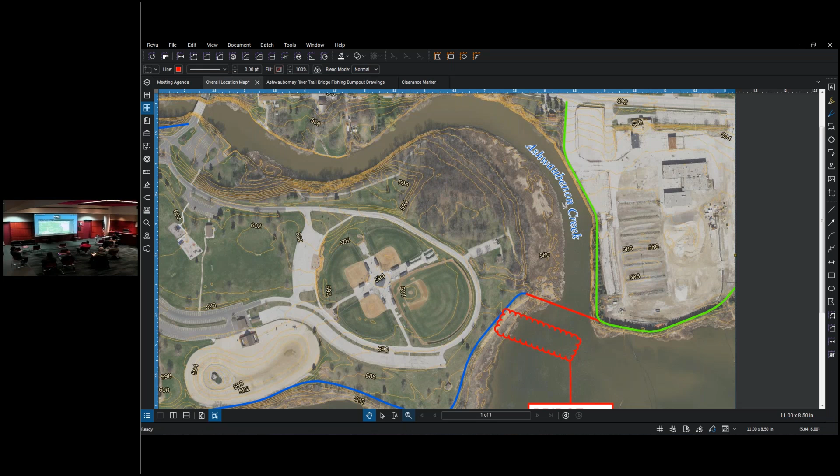All right, so let's start with some context. The agenda, hopefully you all have a copy of, you can follow along, but this is how I'm going to follow. We'll talk about those items. Let's start with some context of where we are, which you probably all know, but it helps everybody understand what's around it, where it is exactly, those features. So needless to say, the bridge is on Ashwaubenon Creek, adjacent to Ashwaubomay Park here, and Alden Station here.

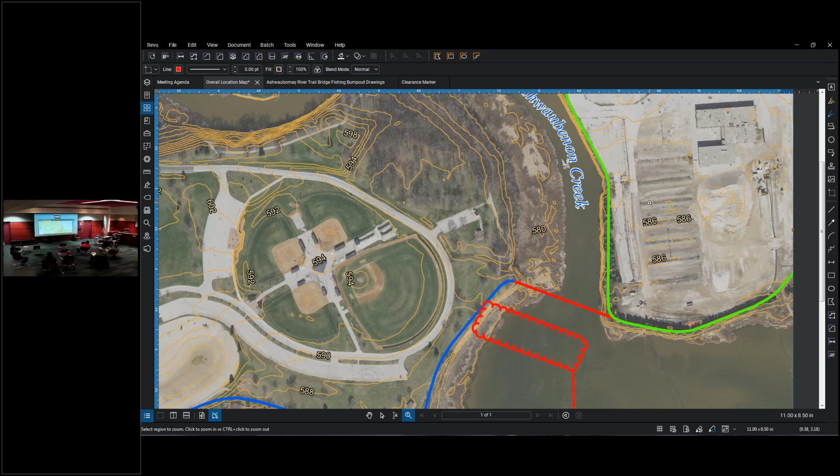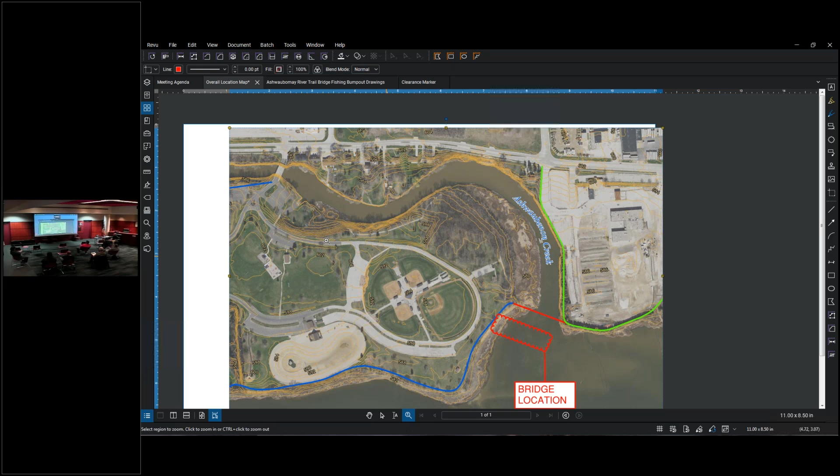What you're seeing, and my bubble moved around a little bit, is as I zoom out, Broadway to the west, here's the entry drive that goes into the park and the bridge. You can see the creek snaking around before it discharges into the Fox River, and the interior of Ashwaubomay Park. What we want to show you here is just the context of where the bridge is, and my bubble moved a little bit, so bear with me.

This is basically the trail. That's a future trail that was studied a little bit. This is also a planned future extension of the trail. And really the bridge, apologize for my bubble moving because this aerial background is a big image and takes a second, but the bridge is basically right here where this red line is.

So it's really right at the mouth of Ashwaubenon Creek, landing on the park side to the south, and then at this little point here, which is at the corner of the Alden Station development, to the north of Ashwaubenon Creek. So contextually, the creek, the little landing, boat landing and parking, the driveway, and as I mentioned, Broadway up on top of the screen, the west side of the site.

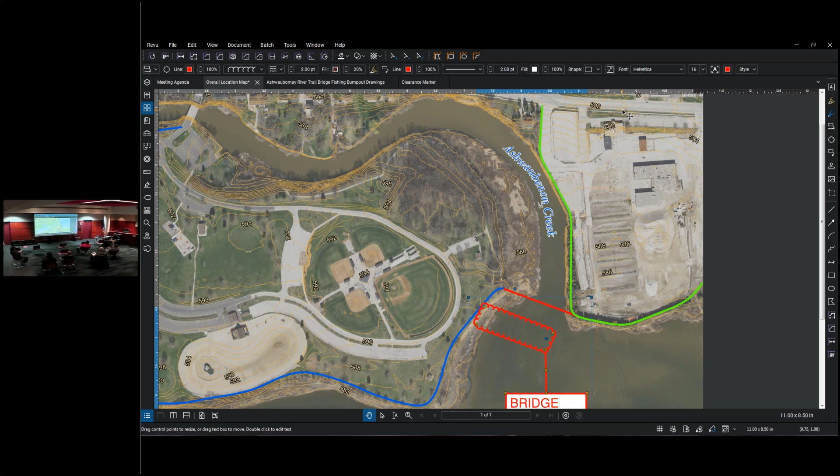So that's context. Let's get into a little more detail on the actual bridge itself, where it stands today. These are development drawings, and basically what this is showing is effectively the alignment in a little more detail than what that last colored chart showed.

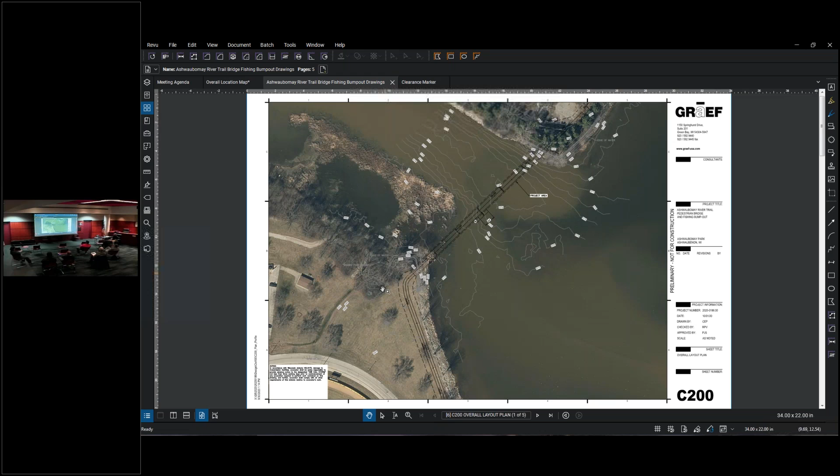Survey has been done, so you're seeing contoured survey lines within Ashwaubenon Creek bottom, the bottom of the creek, as well as some survey along the banks. The trail we've set in alignment, and then we're showing the bridge crossing here.

I'm going to zoom in just a little bit. As it generates, I'm going to pause a second so it can be seen on your end.

As I zoom in here, there's some things we're working out with the design, verifying pier spacings, the column supports basically of the bridge, how long those spans are, where the fishing bump out is going to be, looking at slopes and profiles still, but that's in process.

You can see the alignment of the bridge that comes across here. It's the straight section after the curve on the park side, and then you can see the landing up by Alden Station on the north side. So the bridge basically extends from this location here, just on the bank, to the bank on the opposite side.

As soon as we get on the bank, there will be abutments, and what you're seeing intermittently, there's 1, 2, 3, 4, 5 of them, and those are pier supports, bridge piers that are going to be supported with piling, and then a concrete pier cap. On top of that will be girders, and you'll see imagery of that as we get through this presentation.

From a contextual standpoint within the site, the fishing bump out is currently in the middle, but that's one of the things we're still vetting, where do we put that. The spans right now, there's 1, 2, 3, 4, 5, 6 spans along the whole bridge, roughly about 65 feet apiece. You'll see that on the next sheet as I get into more detail.

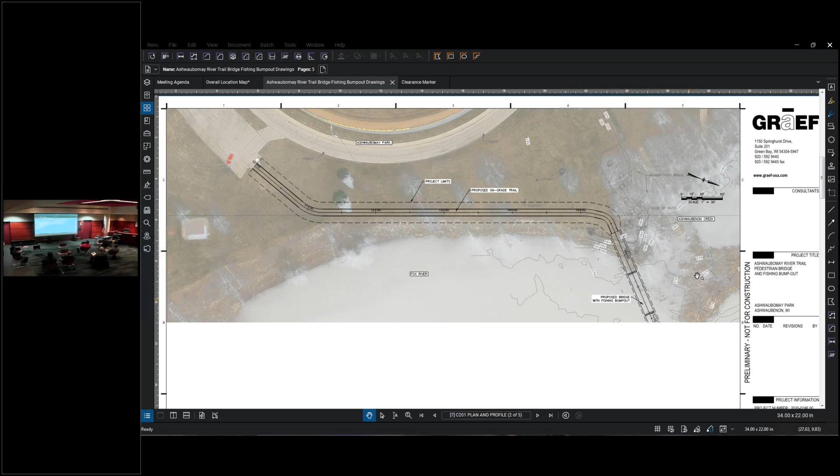Thank you. So the trail coming through here, again, a 12-foot wide trail coming all the way up to the bridge abutment, and then the bridge is slightly wider at 14 feet. You can see the contouring again around the bridge. I'm going to go to the next sheet, which is really the bridge sheet.

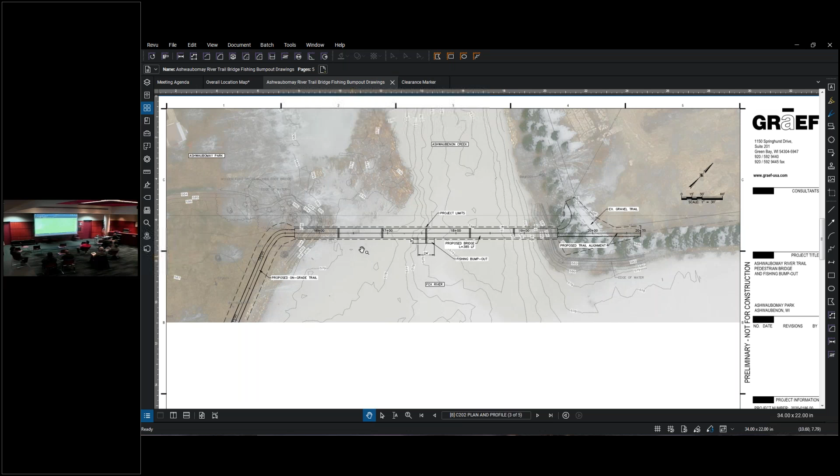Again, there will be a profile view on the bottom that shows the slopes of the center of the trail and the bridge itself. As I zoom in here a little bit, you can see better the building or the bridge outline, and you can still see the contours.

You can see the deep part of the channel at 573. You can see the bank at about 580, but there's pretty shallow areas as you get to the southerly half of the bridge, a couple 2 to 3 feet deep generally, and then a little bit of a steeper drop off on this side.

Basically, we're showing a fishing bump out in the middle, which we're trying to vet exactly where we put that. And then, as I indicated, piers at these locations currently have about 65 feet spacing between them, so that's a 65-foot clear span in each of these locations.

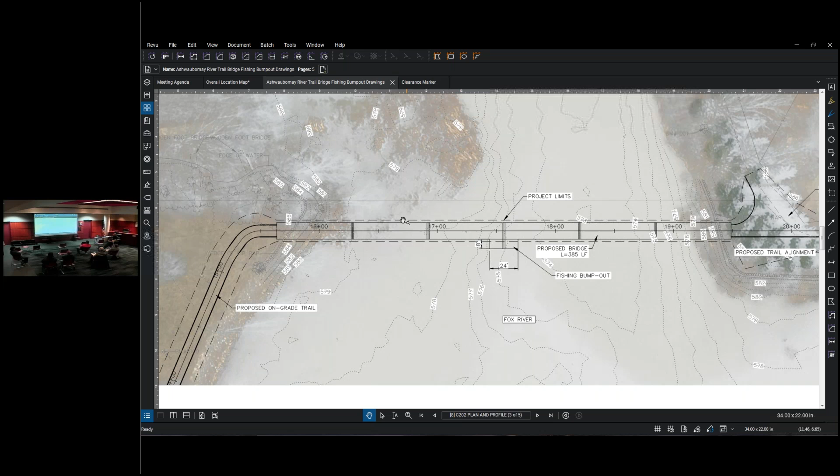And then the landing on the north end near Alden Station - this is being looked at a little differently because of the sloping we need to do to get down and connect that trail going by, but this is obviously still in development.

So that's kind of the civil drawings, if you will, which show layout, alignment, slopes, dimensions, location - those kind of things. The next things I'm going to show are the structural drawings, and this will give you a better picture of what it's going to look like.

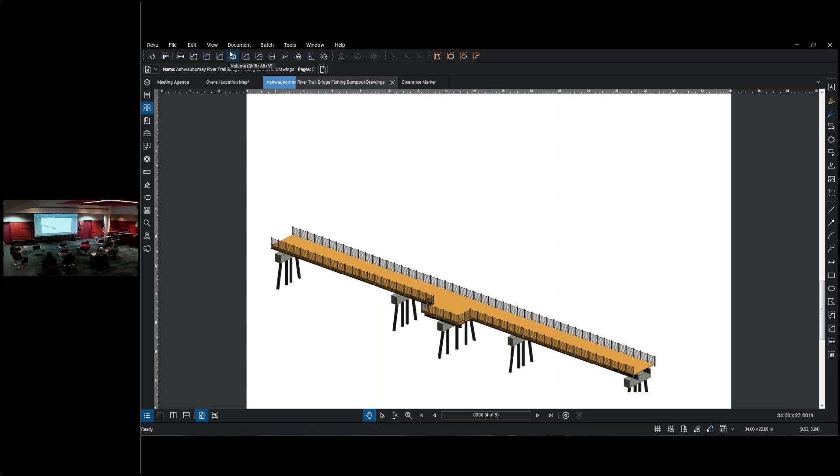This is a rendered 3D Revit snapshot - we build these things in a model, and this is a snapshot out of that model. As I had indicated before, we're going to have piling supporting the piers, which the girders will sit on, spanning through 5 different piers, plus the abutments at the end - so 1, 2, 3, 4, 5, 6 spans.

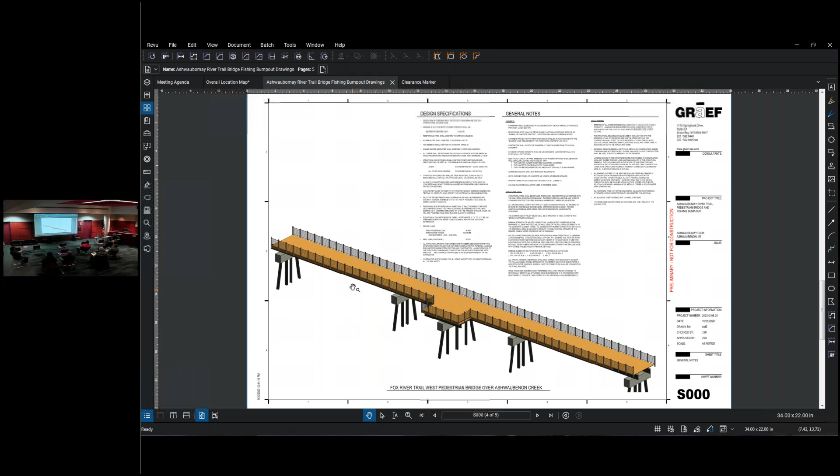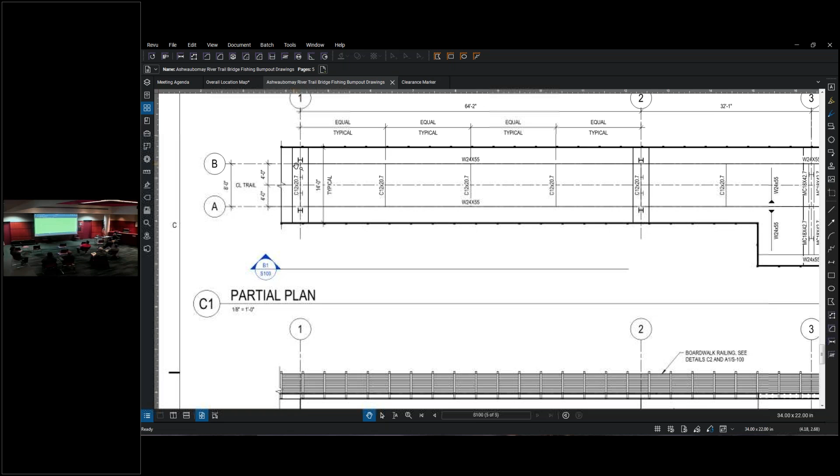That's just a snapshot, structurally pretty technical. The next sheet I want to show is again a structural drawing, showing an example of the bridge deck with the fishing bump out. As I noted before, it's 14 feet wide. This is the spacing between the girders that you're seeing here, along with some other structural information.

More importantly, just to give you an image - I'll show you some photos of a bridge. In the last 6 or 7 years we've probably done half a dozen bridges similar in this design, meaning they have the piling, round pipe piling with a concrete pier cap, a steel girder beam, and then decking - timber with a composite surface.

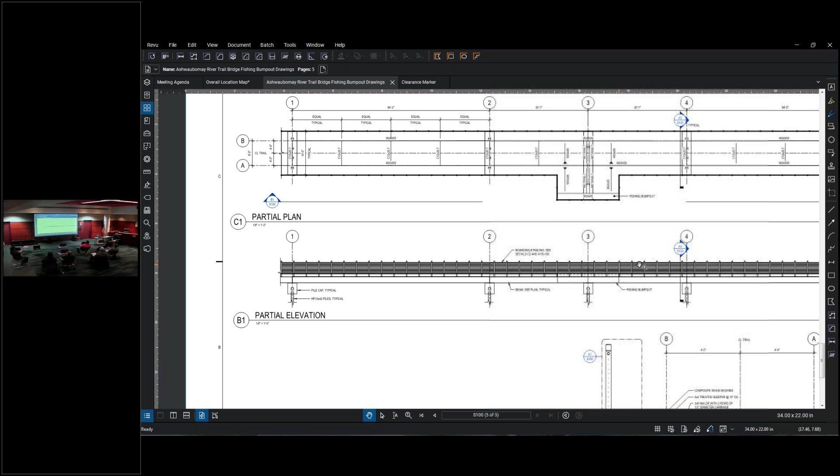And then the railing is a combination of a cable railing with a top and bottom aluminum rail and wood posts. That's what you're seeing here - the piling, the pier caps, the girder, and then the decking and railing that will be up on the bridge deck, protecting people from falling into the water.

Here's a little structural view - if I cut a slice through it, if you're standing on the deck, this is kind of what you're looking at: the deck here, the railings on the side, the girders, the diaphragm which connects the girders, and then the concrete pier cap with the piling that would be driven into the riverbed to support the structure.

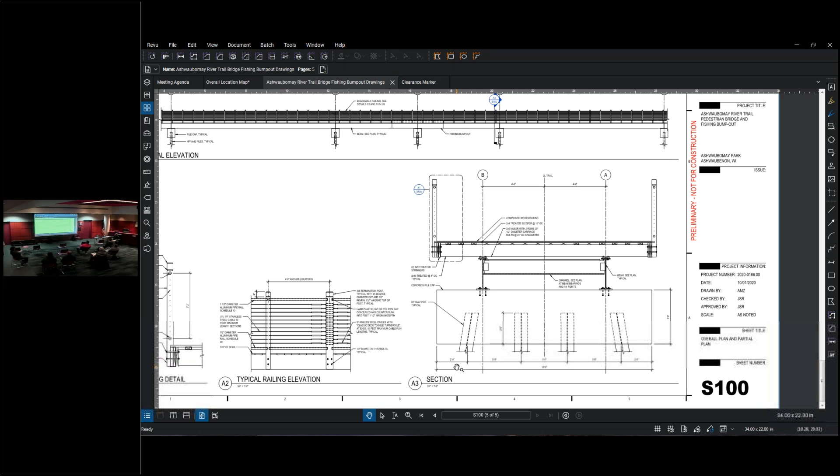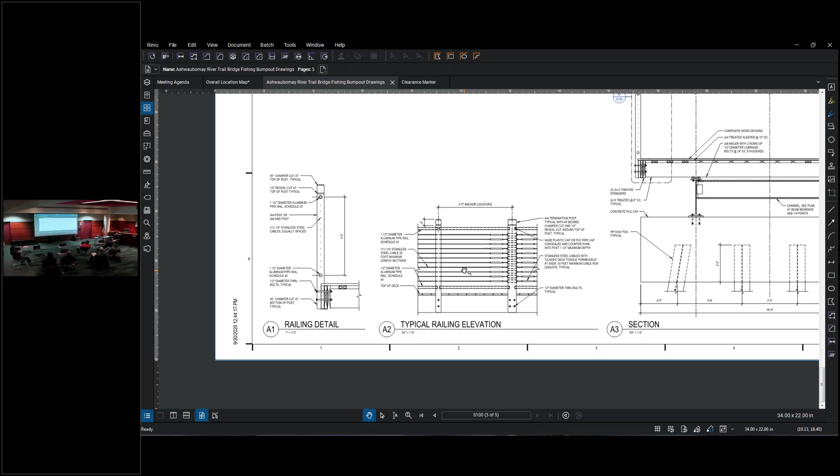And then just a little snapshot here of the railing detail itself. I'll have some pictures so you can really see a 3D or colored version of this, which will give you a lot more clarity, but basically it's top and bottom rail, the decking being here, wood posts, and then stainless steel cable railing in between to provide the OSHA required safety separation gap that we need to meet.

So that's our structural drawings - again, pretty technical, but it gives you a little picture of it. I think more importantly will be the next images I'm going to show.

First off, I'm going to show you an image of the fishing bump out, which is that center feature off of the main deck - the 14-foot wide deck, typically it's 12, so we're actually looking at a 2-foot wider deck to allow, if people are fishing along the railing, that there's still room for 2-way traffic to pass, bike and pedestrian traffic.

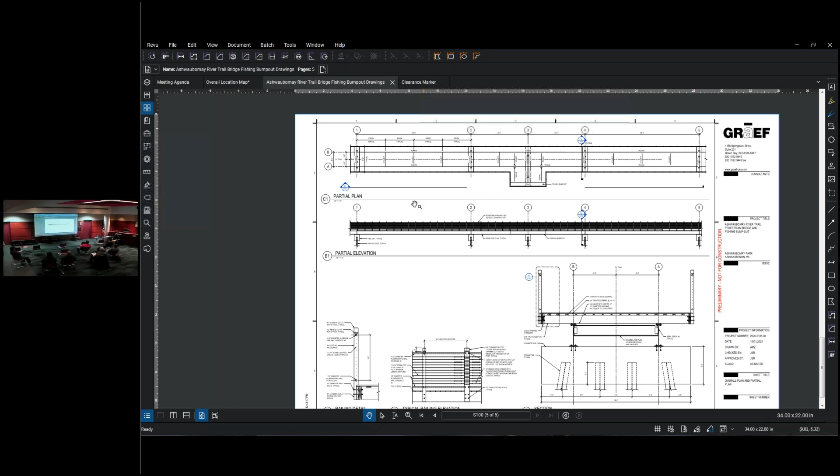But this gives us a little bit extra width for railbirds, as we call them, and also a fishing bump out, or observation area, that people can really get off that traveled way.

So let me get to that imagery. There we go. Okay, so this is a rendering that we've done for a previous project, to be truthful, but it is the same design and it's the same size. Roughly speaking, this is an 8-foot by 24-foot platform that extends off of the main girder.

You can see we have steel girder framing around the base of it to support that, but otherwise it's the same design. It's going to have a timber substructure with composite decking, wood posts with top and bottom aluminum rail, and you can kind of see the cable railing in between.

Lighting, for this client, that's what they wanted the lighting to look like, but we're working that out with Rex and his staff yet on what that's going to look like.

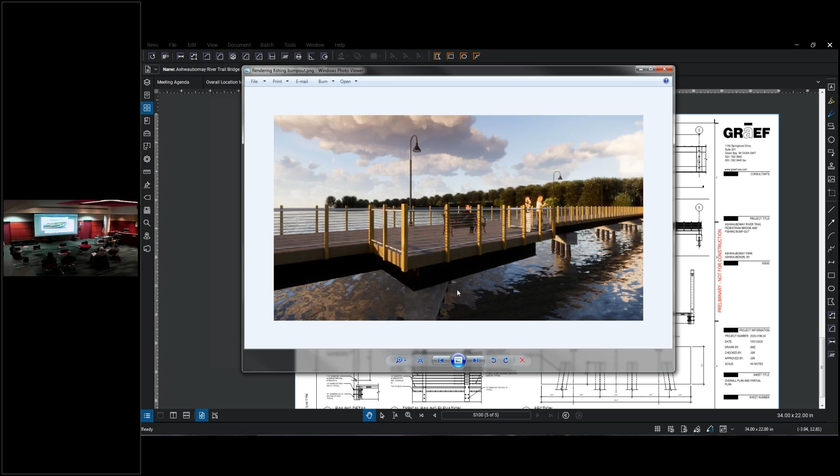Just a little bit, if you look down here on the right, you can see the piers with the round steel piling with the concrete pier cap, and the girder is sitting on top of those. So this is just a representative image of what it would look like out on your bridge when it's ultimately completed.

Now I'm going to show a couple true real bridges that we've designed. If you're familiar with the Loop the Lake bridges in Neenah and Menasha, those are projects we've designed, both of those bridges, and the Trestle Trail that goes across Little Lake Butte des Morts, that's another one of ours, and the Herb and Dolly Bridge, which is in Herb and Dolly Smith Park, also part of the Loop the Lake.

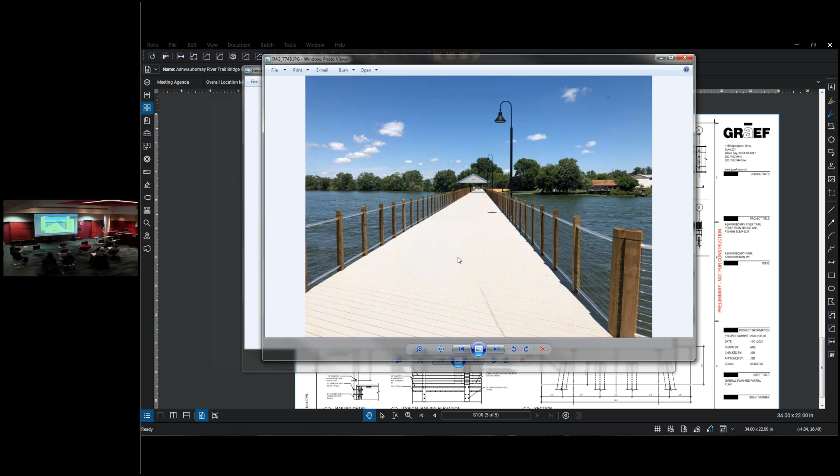So there's 4 bridges on this loop, and this is the one we're looking at here, the actual Menasha one. So this is obviously you're standing on the deck right at the curve, but it gives you a perspective. And again, this is the same width as the bridge we're looking at for Ashwaubenon, 14 feet wide. It's going to be the same general type of railing.

Again, if I zoom in a little bit, you can see the cabling is really small. The reason we do that is for visibility, so we're not obstructing people looking out over the water. That's one of the needs and reasons people come out here, with the top and bottom rail to protect, and timber spacing posts.

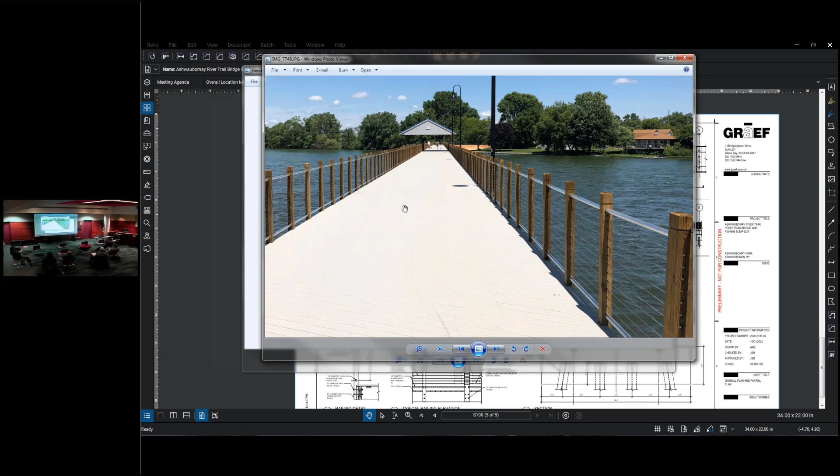Next photo is going to give you a kind of a perspective view. So this is the same bridge. And again, this is standing - the last photo I was taking was about right here looking towards this canopy.

And again, this is their fishing bump out location. So they elected to put a shelter canopy over the top, but that's where their fishing bump out is, right here on that downstream side of the river.

The top of the deck is roughly about 4.5 to 5 feet, and this is about 6 feet to get down to here. So that's kind of what you're seeing in this image. People standing on here, you kind of see how someone might be about that same height standing on the water if they were down below it.

But basically the pier cap, the piling, the girder, the decking, and the railing - again, lighting still to be determined. So this is a true bridge, and you're welcome to go down and look at them and use that trail as well, but it's a very similar design for what we're looking at for the bridge at the Ashwaubomay Trail, River Trail Bridge.

One of the last things I want to talk about before we open it up for questions - I know some of the concerns that we've heard is about that clearance. We can talk about that certainly, but obviously as an aid to that, trying to bring that image up, there is a clearance marker that we would be looking at putting at this bridge.

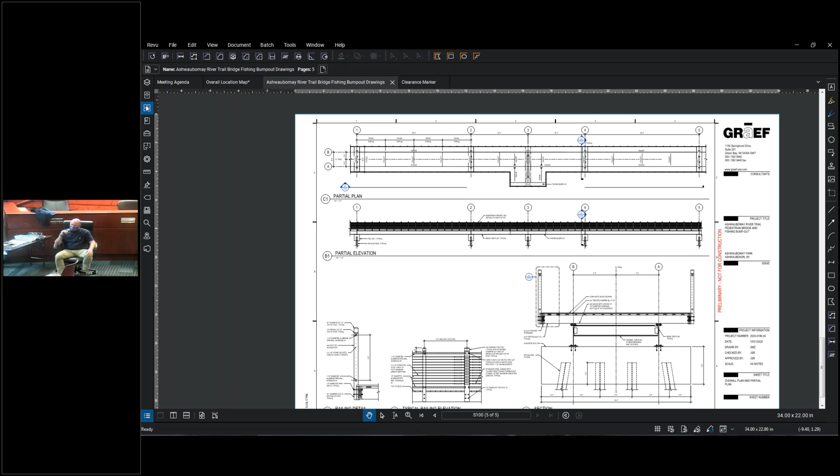All right, thanks, Patrick. I'm going to head off some questions that I know are going to be asked right out of the gate, and I'm going to ask you right out of the gate, Patrick: what is the minimum DNR requirement for clearance on a bridge like this?

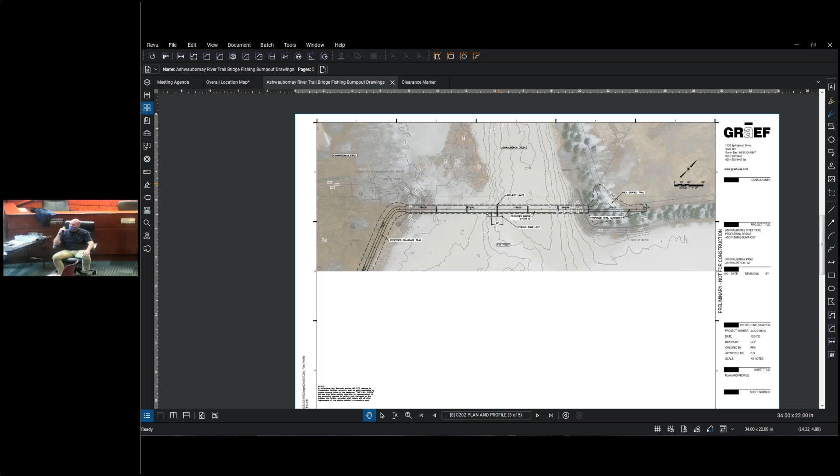Okay, so there obviously are state codes that we need to follow with this, because this will require a permit through the DNR. We've already submitted preliminary drawings to them, just to get initial feedback. We want to know early on if there's any concerns, and one of their comments, consistent with the statute, is that the navigational clearance above ordinary high water mark is a 5-foot vertical clearance above that elevation, and that's to our low steel - the lowest piece of feature, if you will, relative to navigation.

Now, ordinary high water mark is a somewhat fluctuating thing, but the DNR would usually make a determination, and it's typically where the bank is showing wear or erosion, because that's where the water elevation is normally at. Ryan, if I'm saying that incorrectly or there's more detail, please jump in, but that's generally the approach DNR takes about ordinary high water. So it's roughly where the normal water is during the most time of the year, evidenced by certain features out on the site when they take a look at it.

But 5 feet above that is the minimum that the DNR would require, and that's the high water mark, which we're pretty much at right now. Correct - it's not like the 100-year flood. Ordinary high water isn't a flood event high water; it's a normal, more typical high water elevation.

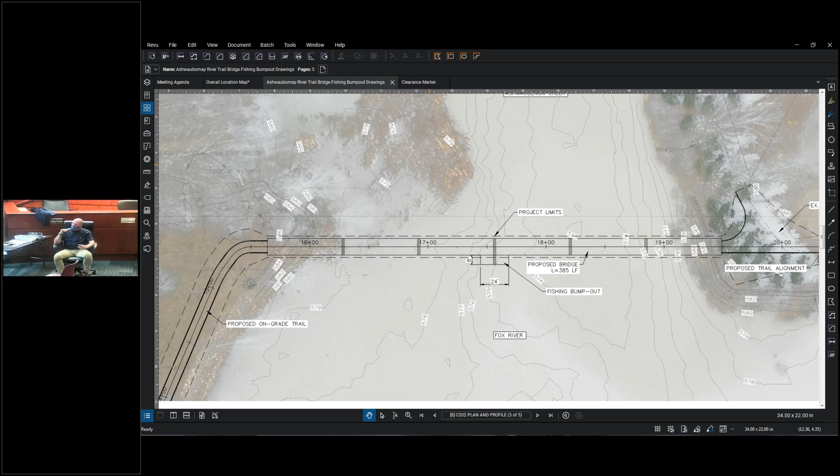With this particular bridge in this setting, how high potentially could we make that bridge without impacting the project in and of itself?

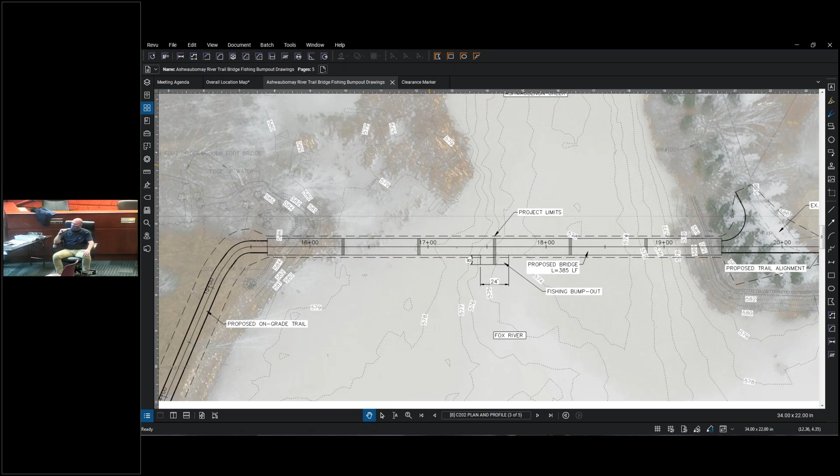Well, we've taken a look at a number of options to see what we can do. So if you think about it, we need a 5-foot clearance, and the structure girder, which is usually around 30 inches deep or so based on span length, plus the timber structure and decking, that's where I got the 4.5 to 5 feet of total section depth. You're going to be about 9 feet above the water elevation.

Now you can see on these contours from the water, roughly around 581 or so, it's about 4 or 5 feet up to the ground. So the girders are coming in basically where the ground is. So we have about a 5-foot drop to make up on a slope on both approaches, under this scenario of a 5-foot clearance.

The north end is really giving us more challenges that way as far as impacts, so we don't have any fill within the waterway, and that's really what we've been looking at as a criteria for the approaches. We don't want to fill anything in the waterway, and we want to comfortably meet an ADA slope along the profile of the bridge, following the route.

We felt that at the center span, at least, we could get up to about a 7-foot clearance without really impacting too much. It'll impact some, but trying to get down the slope and back to match grade on the north and south end, we felt that was doable without adding a ton of cost to the project, both on the approaches as well as more piling, because you have more length in the piles to bring it up higher, more approach work.

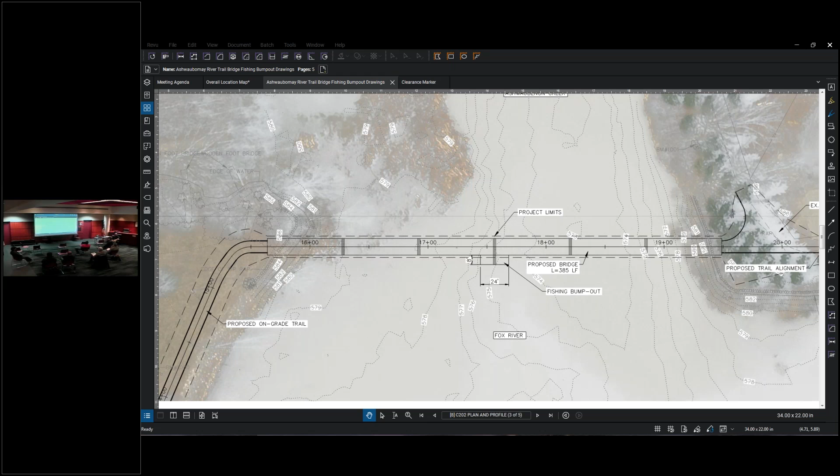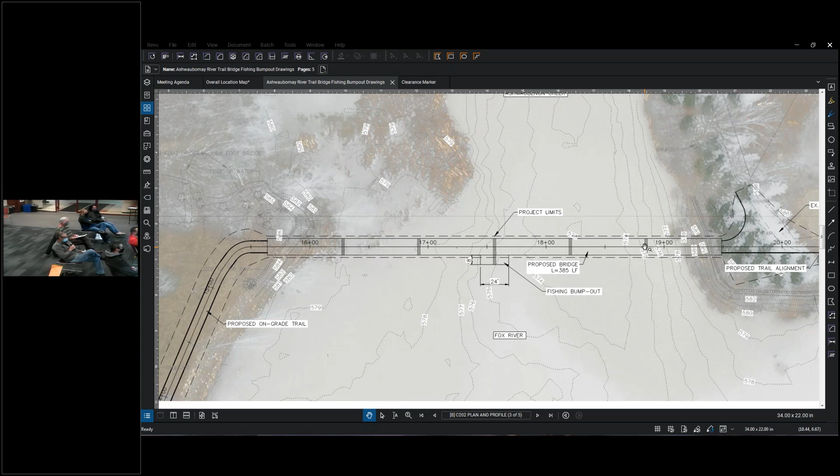Hi, my name's Brett. I live on the creek here, and looking at the proposed bridge, the deepest part of this creek right now is even to the right of your cursor—no, you got to go farther north. Pretty much where that second span is starting is where the deep part is. Right in there is where the deep part of the creek is. So any boat traffic, particularly myself, I'm hugging the shore there because that's the deep portion of the creek.

And historically, when we were at the lower water levels about 6 years ago, all where your fish bump out, heading east from that, it's 2 feet deep in there. And just basically where the cursor is, it's about 4 feet deep. So there's a very small channel really where you can get a bigger boat through there. So that's one of the concerns.

The real concern is the height though. My boat is at least 9 feet of clearance I need. So we've got multiple boat owners along the creek here who will no longer have access to the river. So that's our big concern.

And then I don't know if this is a question for you or more for the planners: what is the cost of this bridge versus having the trail head to the west up to the sidewalk, and then go the quarter mile from this, from Hanson to the entrance of the park, and connect with the rough dirt trail that goes around the creek there, building on it? It would seem to me it would be a much better use of funds to just use the sidewalk as opposed to building this bridge. That's all I have for now.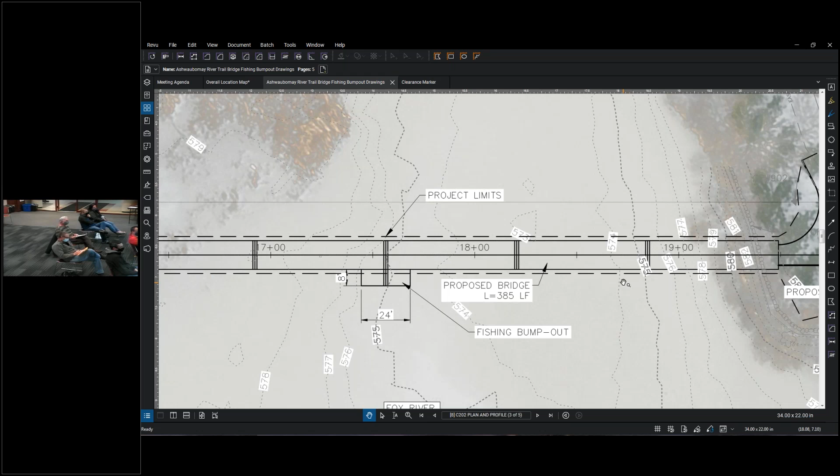Sure, good points. So the bridge, the total project, we're probably looking at about 1.4 million for the bridge, for the whole thing. That includes the landings, the connection to the parking lot, the lighting, the electrical for the lighting—everything that would go along with it, as Patrick kind of showed in the picture.

Regarding the cost, the source of those funds, we already have that money. It is a combination of TIF dollars through TIF 3 from the different TIF district buildings that have been built within that area, as well as some park development funding.

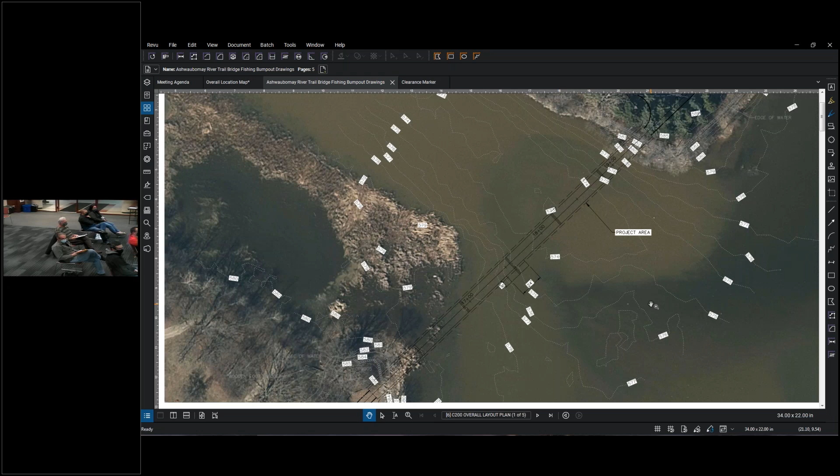Whenever a new home is built, a new business or apartment complex, each developer has to pay a certain dollar amount per unit. That goes into the park development fund for amenities for people continually moving into the area, whether business people or residents. Park development funds were taken from the Marriott that was built, from the apartment Manso Flats built by 172, and the new building going up right next to Manso Flats. Everything around there has contributed to park development and into TIF.

So the funding is there, that's the good thing. This project was put in place, and a lot of these funding mechanisms were made decades ago in preparation for projects such as these. So whatever happens, however this trail develops, the money is already there for it, and it's not going to increase the tax rate at all, because it's already been paid for by the development that has already occurred in waiting for projects like this. I don't know if that helps at all.

I'm just thinking the kind of money they're spending on the bridge would be better spent enhancing the park itself, adding playground equipment, basketball courts, et cetera. It's a nice looking bridge, but it doesn't make that much of a better walkway than if you just bring the walkway out to the west of the sidewalk for the quarter mile, since it's literally less than a quarter mile to the entrance of the park, and have it loop all the way around. It's still a trail, it still goes along the river, just without this added expense that I think is unnecessary.

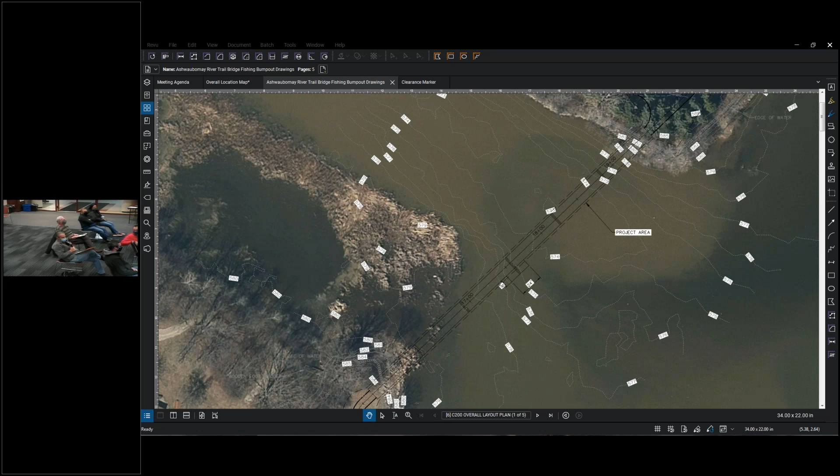So I'm new, I've lived here about 4 years and close to Brett. I have a 3-year-old and a 4-year-old, and the main reason I bought this house was because of the boating access. I want to be able to take my boys fishing, take the boat out, go up to Door County, do all that.

I'm behind what Brett said 100%. I think it impacts all of us that are on the water, and I don't think it should be anything lower than 5 or 6 feet - it would have to be predominantly higher to get boat access through. Like Brett said, right in that channel is where you need to go through. There's boats that come through here all summer long, 2, 3, 4 boats going up the creek, at least to the bridge, if not farther, at the entrance to the park.

There's a lot of boat traffic in there that may not be known to the average person, but I see boats in there all day long, especially fishermen and people on their pontoon boats cruising along the river on a lazy Sunday night. I got young kids, I just bought a boat this year for the first time, I've been excited about it. This comes up, and it's shutting down everything I thought when I bought the property. So I'll say that and leave it for somebody else to have questions.

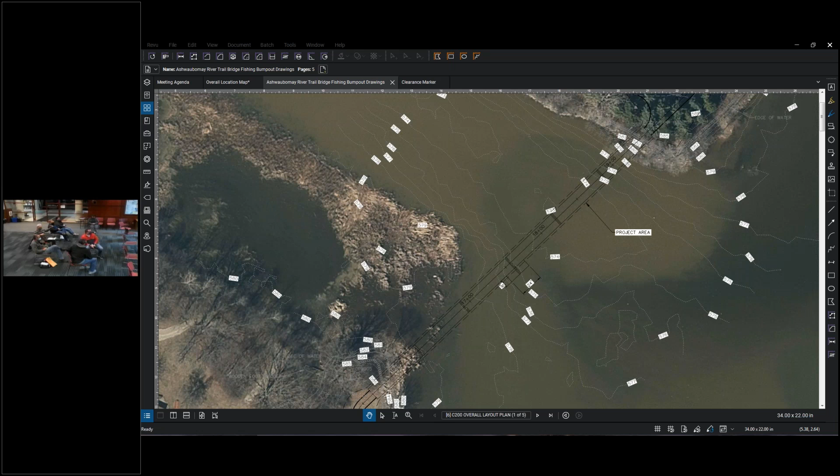At the end of the day, the bridge just doesn't make sense. The net of being able to cross the creek, run around the park, and literally end up at the entrance of the park, doesn't make sense. The bridge doesn't make sense. It doesn't complete an overall project. The bridge doesn't make sense. There should be no bridge. Thank you.

All right, any other thoughts or concerns, comments? Patrick, anything on your end? Nope, I have nothing more to add right now. All right, if there isn't anything more, I guess staff will reconvene over the course of the next couple of weeks and take a look at what we can do and what options are out there, based on some of the comments and concerns.

I will say, and I've got to say it because I'm a park and rec guy, and Mike, you and I have had some good conversations before on different things—your comments are all appreciated, but the bridge, to me, does make sense. I think a lot of people, with the housing going up along the waterfront, with the neighborhoods we have down by the Railroad Museum, the Fort Howard School neighborhoods, the Manso Flats, the businesses being built up there, that whole waterfront is being developed. And people want to be by the water. That's why the Fox River Trail is as busy and well used and loved as it is. It's because it's on the water.

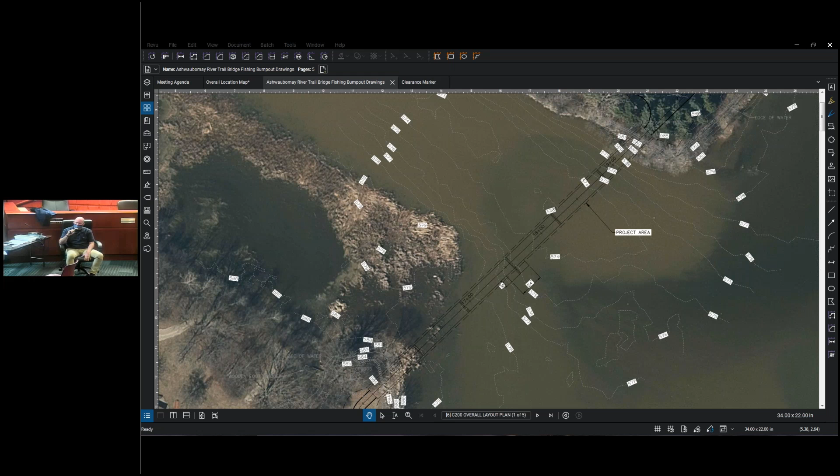Yes, we can use that. That is an option, but how many unique places have a waterfront trail like that? You've got one on the east side of the river, and a lot of people are encouraged when we bring this forward about having something on the west side. It's not as long as the Fox River Trail, not by any means, but it would be an awesome amenity for the community as a whole, especially for folks building homes on the waterfront, those currently living in the neighborhoods by Fort Howard School and the Railroad Museum, and even folks in the De Pere area walking to the north.

So again, opposing view from what you have. I get what you're saying, but I think it would be well used and much appreciated by a lot of folks. Absolutely, that's what we're here for.

Rex, I understand what you're saying, but it goes nowhere. You build the bridge, you enter into the park, and that's where it dead ends. It dead ends at the other entrance. You already have a bridge at the entrance to the park. I don't think adding this bridge for the unbelievable community you guys are building gives you access to the park. You already have access to the park and a bridge.